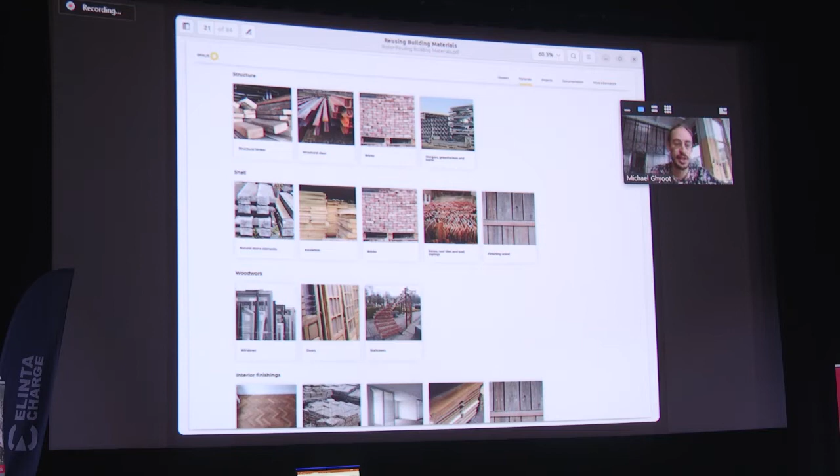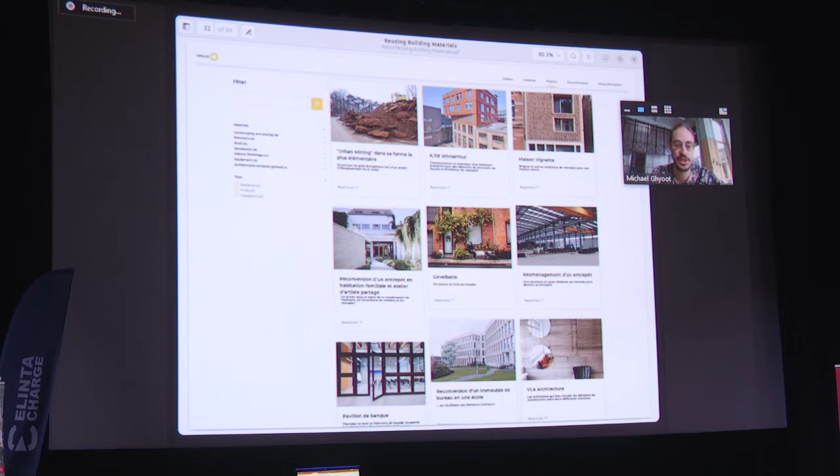But since 2011, we also developed a more documentary part of Opalis, on which we document commonly reclaimed and reused materials, but also presenting a few inspiring projects demonstrating that reuse is a possible strategy that can bring interesting results. And there is also a lot of documentation, notably for what concerns the integration of reuse strategies as part of public tenders and tendering procedures.

And so Opalis for us was also an important project, because it demonstrated to us that even though some materials were already well taken in charge by the existing dealers, other materials were not, and more specifically, quite modern materials coming from more contemporary projects, maybe more urban projects, tertiary sector buildings. All these materials, although possibly reusable, were not reused. They were discarded as waste in the main demolition waste stream in Brussels. And so that triggered the will to launch Rotor Deconstruction.

So it was in 2016, and we moved to a place in Brussels, a former chocolate factory, in which we are still located for the moment, but we plan to move this summer. So it was a temporary location. You see there the outdoor yard. We also have this warehouse in which we can store quite a lot of materials, and we have a part of this huge box there, which serves as a showroom for the materials.

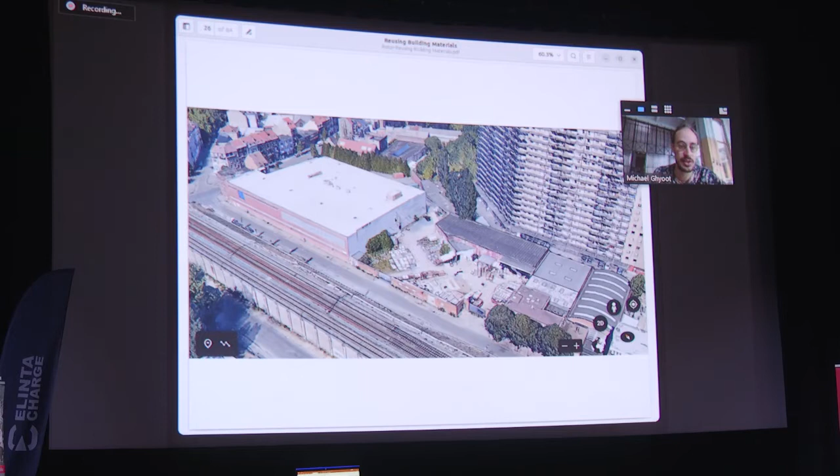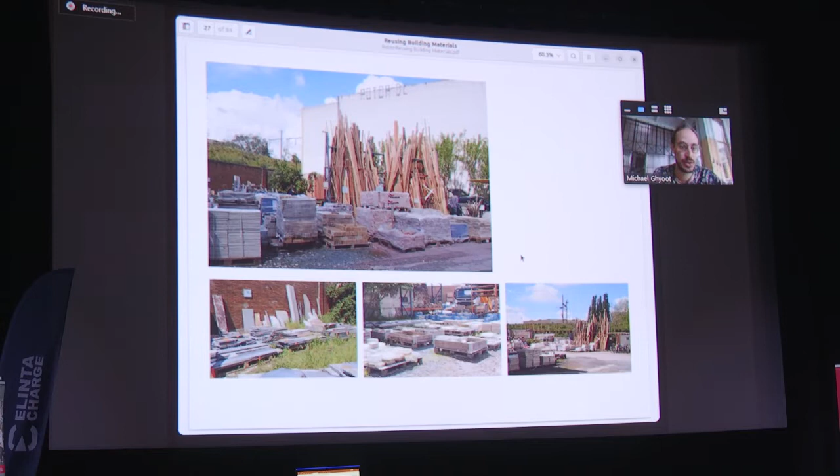So you see there a few views from the yard; all the materials that can be kept outside are stored there. You see there the interior of the warehouse. Obviously, in Brussels and as close to the city center as we are, each square meter counts, so it's quite dense, meaning quite a lot of logistics to operate that properly. And then here you see a few pictures of the shop where people can come and buy materials.

We also have a web shop, which is the web vitrine of what we have in stock for the moment, which also allows customers to buy materials online. You see there a screenshot from the website. Obviously, a big part of the work consists of documenting the materials we have in stock. Things such as the dimensions, the exact state, good pictures of the materials. This is really important to foster the demand for such materials. And so it's an important part of what we do.

You see there a few pictures of how we procure the materials. There are different ways. Sometimes we go ourselves with our own teams on site to do the dismantling ourselves. Other times we trade directly with other contractors or even other reclamation dealers to exchange batches of materials.

And since a few years, we launched a deposit scheme. So it means that people, professional and private clients alike, can bring materials to our facilities, and we take care of the sale of these materials, and if necessary, the conditioning of these materials. And then we split the profits of the sale, meaning that there is an incentive for the contractors to bring materials to our place.

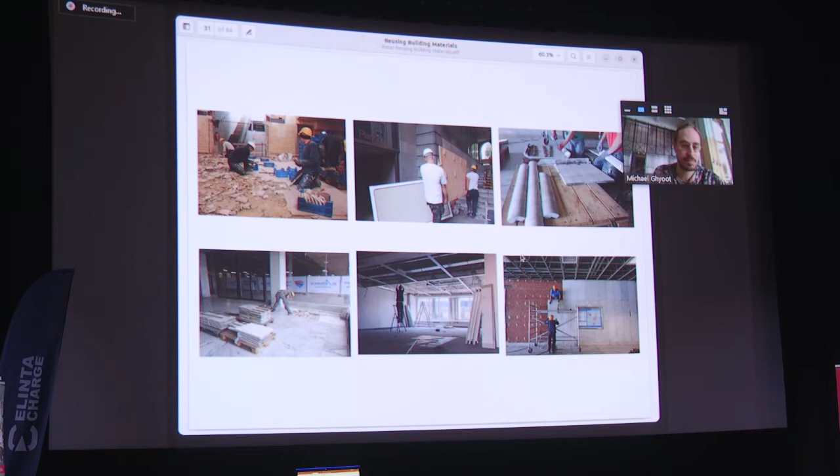And so basically most of the work we do is quite a lot of manual labor, cleaning the materials, cutting them to dimensions, conditioning them, packaging them, documenting them. But then a lot of the work consists of, as I said, documenting, but also the sale of the materials. You don't really buy materials as you would buy a pair of new sneakers. So it takes a bit of time, and we do provide a lot of advice to the buyers.

And then these different experiences, we also try to foster them in ongoing projects, rather with the role of a consultant, of an expert, if you want, assisting building owners and designers in integrating building materials.

And this allows us to identify a few barriers and a few challenges coming with this idea of reusing building material. So a good project to illustrate that is the renovation of the Zinneke headquarters. So Zinneke is a non-profit organization based in Brussels, active in the social and artistic sector, and they got the opportunity to renovate, to rehabilitate quite a complex set of buildings in the city center of Brussels, thanks to a European funding, which allowed them to carry on all the works and all the projects.

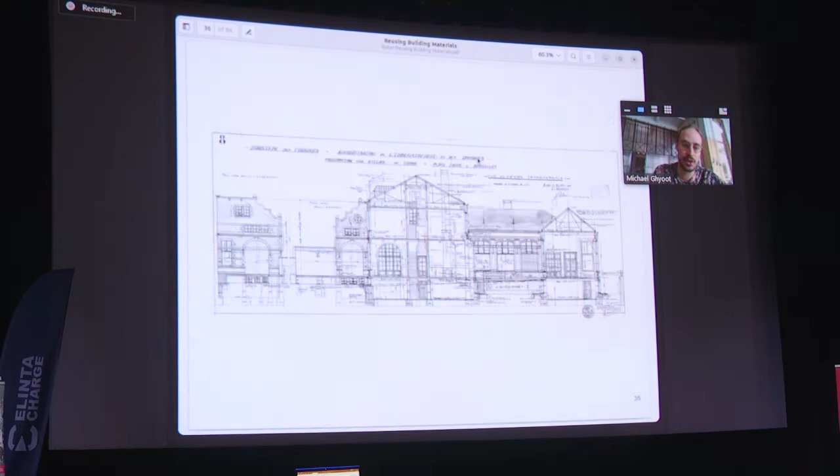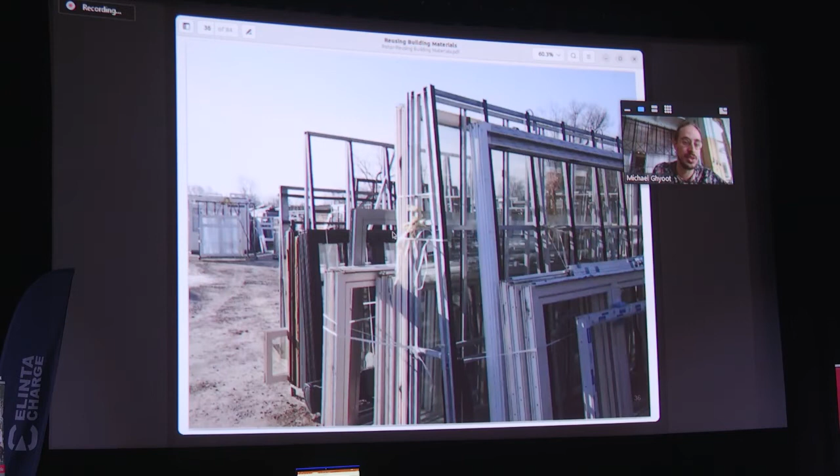And I will just focus on one of the operations in this project, which was the idea of reusing windows for a back facade of one of those street buildings. One of them had to be slightly extended, and so a new facade was to be built. And we wanted to reuse windows for this part of the works. And so we knew that there was a market for that. We knew a few dealers, thanks to the Opalis visits, active in or completely specialized in second-hand windows. This is an example of the website of one of these dealers.

But at the time of the building permit, we had no idea of the exact dimensions of the windows. We hadn't bought them yet. So what we did is summing up all the requirements in terms of urban regulation, in terms of fire resistance, in terms of the light, the surface of the light, etc. And so we ended up with this drawing depicting the minimal and the maximal surface of the windows. And we told the urban authorities the windows will be somewhere in between those two limits.

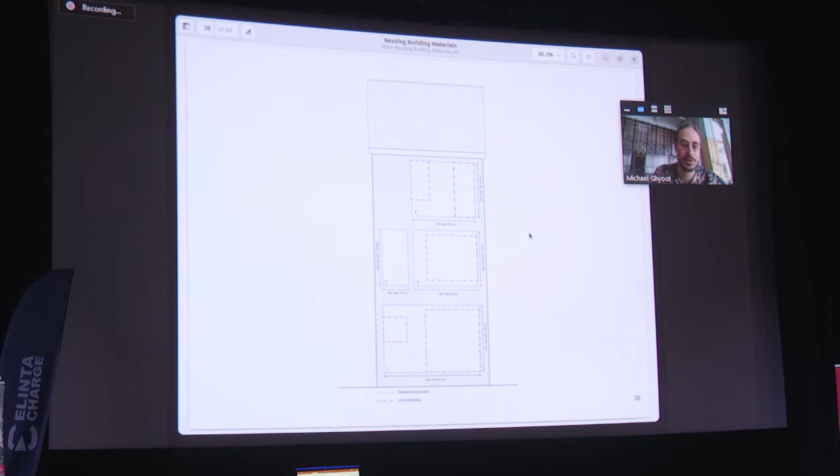And happily, they gave the green light, possibly because it was a back facade that nobody else would see, so it wasn't that important. I imagine it wouldn't work that well with a facade on the street, but it wasn't the case there. And so equally, we had to define the specifications. And for some aspects, it was very important to be very precise. For instance, in terms of energy performances, we needed a minimal performance, and that was not negotiable. But for other aspects, we were a little bit more open. For instance, the color of the frames wasn't that important, or even the composition of the frame. It could be wood, it could be aluminium. It didn't matter a lot.

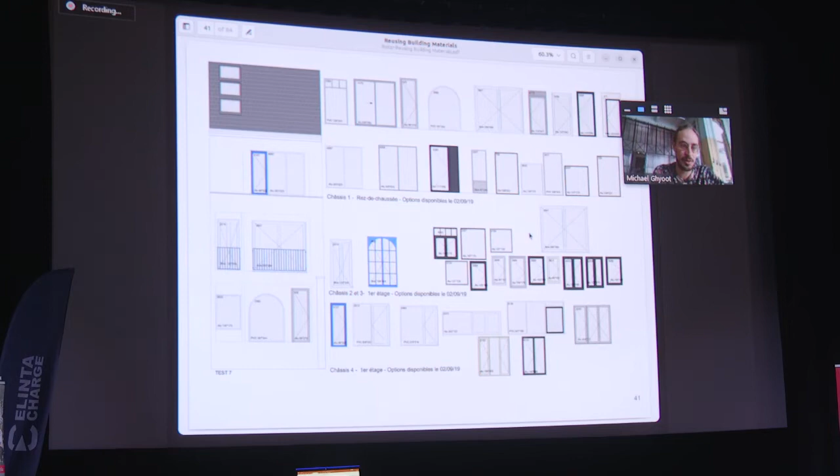And then we had to procure the works as well, and so explain to the contractors that they would have to install windows that were still to be bought and which needed to be from the second-hand market. And a few weeks before the start of the works on that facade, we made a check and we collected all the windows that were available at that time that met our requirements in terms of dimensions and in terms of performances. And so, to our surprise, there were more candidates than expected. To be honest, I would already have been very happy if we found one element for each bay, but there was more than one option.

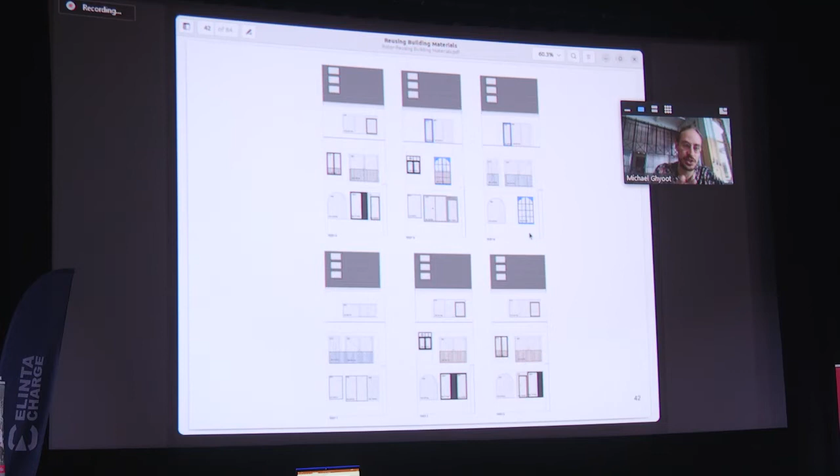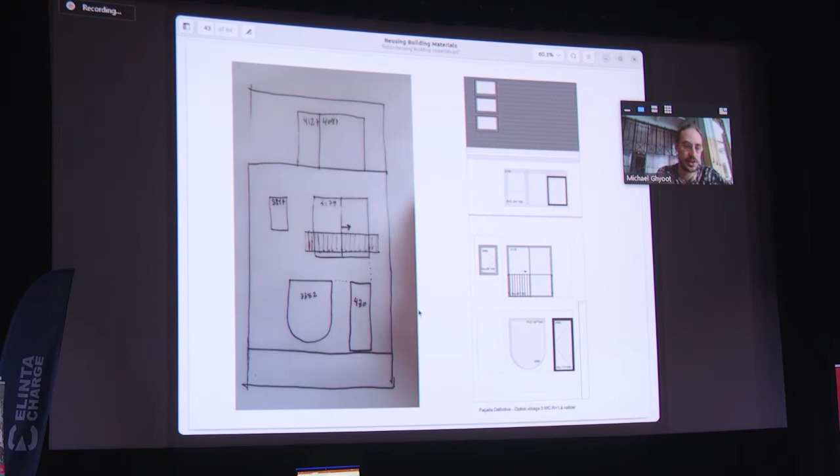And so it allowed the architects to really start a sort of composition process, trying to find the most relevant facade, not only for the objective performances, but also from an aesthetical point of view. And one of the interesting things is that among all the possibilities, there was this rounded window, which was part of the collection. I'm almost certain that the architect wouldn't have drawn that spontaneously, but since it was in the selection, it triggered something with them, and they started playing with it. In the end, they used it upside down.

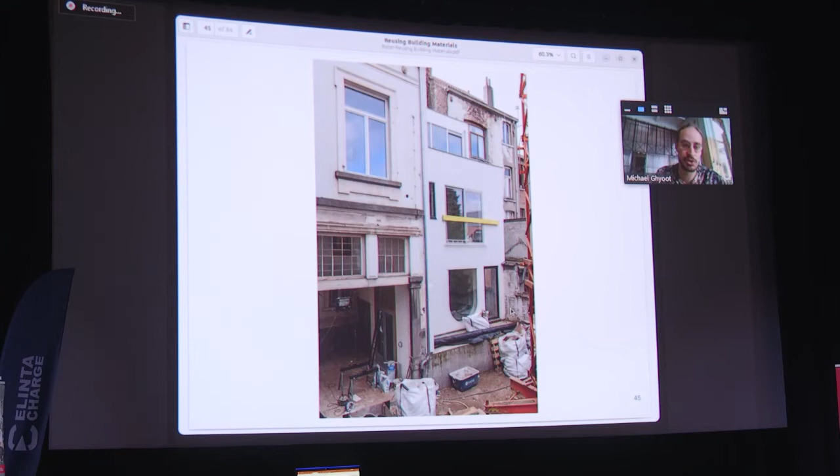This is the work in progress, and then you see there the facade almost finished. The fact that it was a wooden structure also helped a great deal, because it allowed a bit of flexibility in the dimensions of the bay and that sort of thing. It wouldn't have been the same with a concrete structure, for instance. And you see there the finished pictures. And of course, the rounded window here is a sort of connection with the original rounded windows from the original building, which was preserved as such. In the end, in this project, we also tried to report on the reuse efforts.

The last part of the presentation is slightly different. It's about another important aspect when it comes to fostering reuse. It's not so much about procedure and administrative strategies. It's more related to the cultural value of reuse and maybe the clichés that are still present when we speak about reuse, and how we should deconstruct these cultural frameworks.

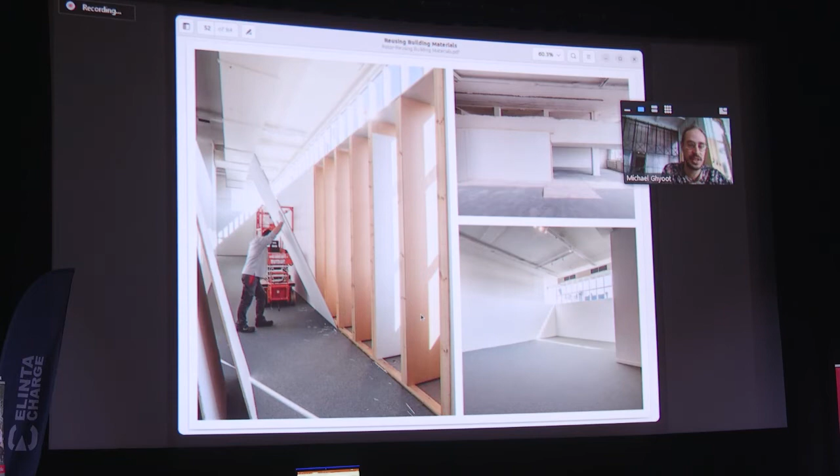For instance, we marked the elements that needed to be kept where they were, but also the things that could be removed and things that could be done with what was removed. So you see there, for instance, a cut through this small room to change a little bit the way it is perceived and the way it can be used, but also those partition walls that are displaced in the space, kept as intact as possible, but simply put somewhere else, so that the scenography changes quite radically, to be honest.

And you see there the final result. So there are still a lot of surfaces to hang the pieces of art, but the experience of the visitor is completely different. And we tried to find back those beautiful staircases, but also the mezzanines, and offer views on the spaces that were lost before that.

So in this case, it was mostly a question of working with the existing and simply trying to renew the way we look and the way we relate to this space by adapting and moving small things here and there, and trying to find the maximal spatial impact with the minimal material impact, if I can say that like that. Another picture of that.

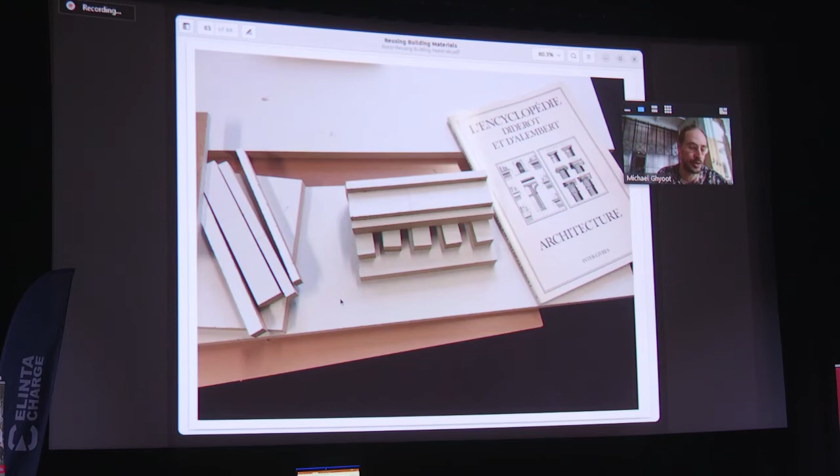And so we got inspired by classical architecture and this very volumetric architecture that brings shadows, that brings places of light, places of obscurity, which really helps to deal with those small defects.

And then a last project which illustrates also this notion of bringing the maximal spatial impact with the minimal material impact. In this case, it was a project for a festival close to Brussels, in which they needed to build temporary stages. And how they did that for the previous editions was to ask different designers to design a project each year for a new stage. But at that point, they realized that it wasn't very sustainable, in the sense that these stages were to last for about a few weeks, and then they were discarded as waste and produced quite a lot of spillage and waste resources. And so they wanted something else, and that's why they approached us to reflect upon another strategy.

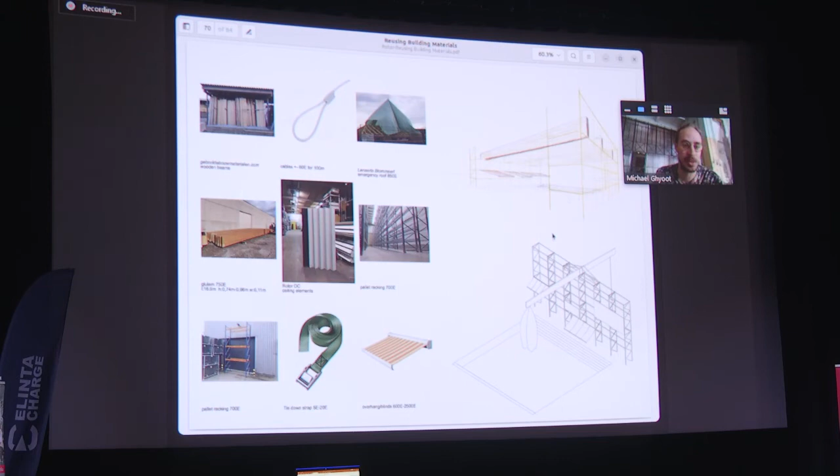And we started work. The first sketches of the design were based on reclaimed elements we had, or we knew where to find, and things that could be reused. But it soon became clear that we weren't able to manage this project. It was a bit too big for us. There were a lot of questions in terms of structure, fire safety, and so somehow we were reinventing the wheel, and that was a complicated process. So we completely changed the strategy and started to think about existing reusable structures that could be used, such as these tents that are used for public events or family parties. And that was a possibility, but the client was not very happy with this idea because it felt very generic to them. It didn't bring any spatial or architectural quality, and this was important to them.

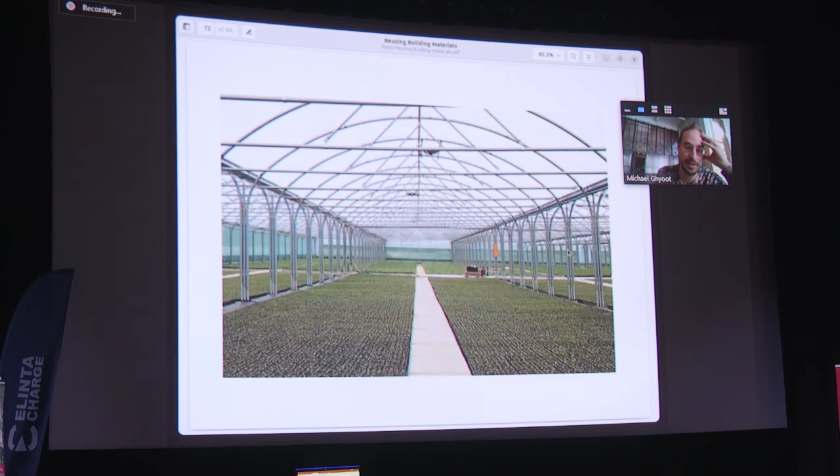And so we continued exploring a slightly different road, which was that of agricultural greenhouses, which are interesting because it's pretty simple, although not that simple, to be honest, but it's possible to dismantle it and to remount it somewhere else. It's relatively light. It's very efficient in covering a large surface with minimal material behind it. And so we started investigating for a second-hand greenhouse. In the end, we found one that was for sale in France, a few hundred kilometers from the site. And so we brought a team of volunteers to dismantle those greenhouse structures and rebuild them anew. It's crazy to see the volume of the material compared to the volume it can cover. It's really efficient in this view. And we transported it to Brussels, where it was rebuilt on this site for the festival.